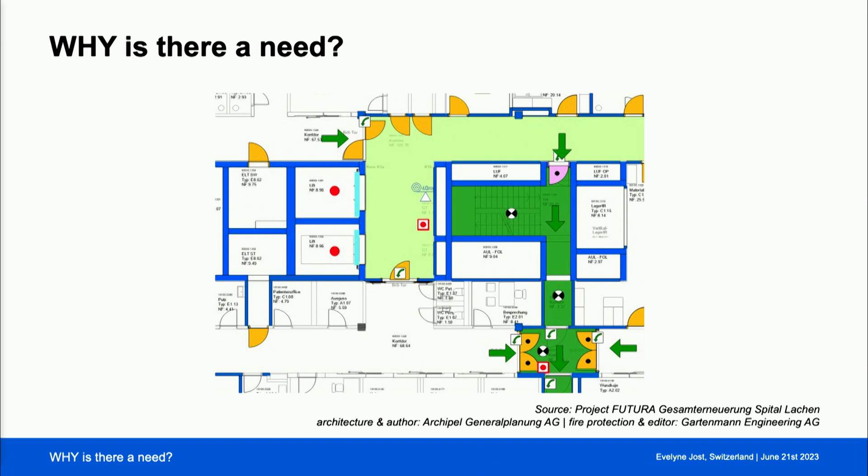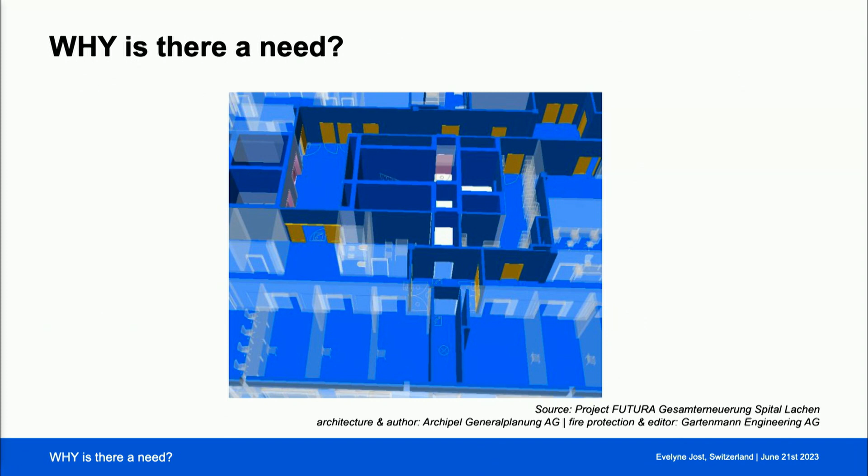Now, what do we do if we hand in a model? It's basically a 3D wall with information. It's more or less the same, it should be the same information, but the authority and the government don't know how to read that. They don't know what to do, and they don't know how to respond. We are trying to change that, of course.

So, why are we needed? There are no standards. Swiss people love standards, so this is a very good thing, but there are no standards. And we have small projects, we have small companies, and everyone is trying their best, but everyone is doing it in another way. If we could establish some standards, or at least some best practices, we would not waste that much time trying to figure out what to do. In the whole building community in Switzerland, we could save so much time, and nerves, of course.

And often the fire protection is left out. We are not there as in Norway. We don't have BIM in every project. But if we do, specialists like fire protection experts are often left out because they usually don't have their own model. So what do they do? They just speak to them, try, whatever. I experienced in various projects that they are left out in the process of BIM. So we need to change that.

And I would say there's not one way we can work together with specialists like fire protection experts. We can do this low-tech. You can sit in front of a computer, give him the information back and forth, and type it into the BIM. Why not? You could do this by Excel, as Michael showed. That's one way to do it, maybe mid-tech or low-tech. Doesn't matter, because you deal with information.

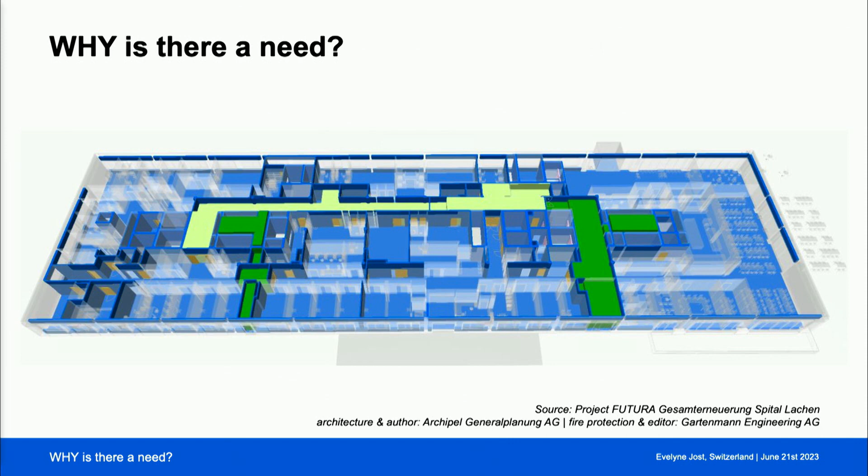So in the project I showed you before, they used the mid-tech version. They took the architect's model. We implemented fire protection information on the rooms and on the walls, but they cannot go back with that. But they can check it against each other again.

So what have we achieved as an association yet? We established an exchange information requirement for the building permit. So we know what the client, at this point actually the government, the authority, needs, and we broke it down. That's just one tiny bit of this exchange requirement. We broke it down to each element, on the IFC standard, what information and where to put it. So we can use this in several projects, with several authorities, in several regions. This is one big result.

But the other one is we developed a new approach. Because we were typing the information just on the elements. But usually, when we design a building, there's the client, there's the user in the first place. So you order a school or an office building. This means you have different requirements and rooms that you will use. And the rooms are always giving the requirements for the fire protection. So why don't we start with the rooms? The rooms are giving us the requirements. How many people are in this room?

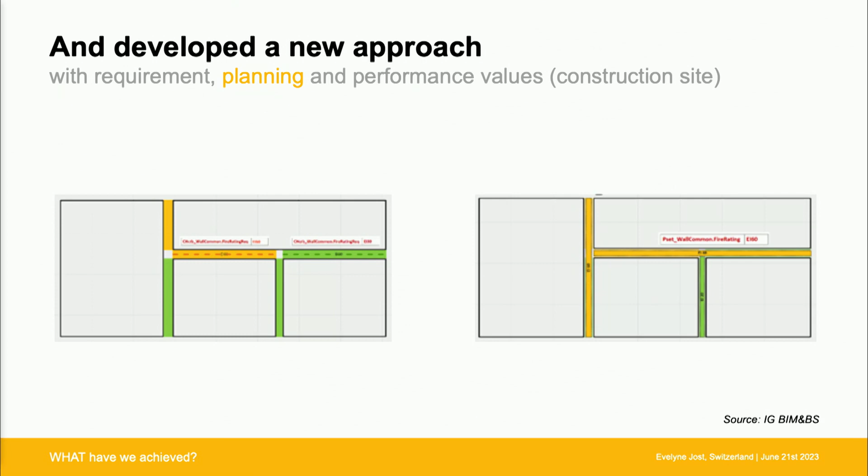And in the end, on the construction site, there will be a performance value which has to meet, obviously, the planned value we have on the wall coming from the requirement. So these are like the 3 steps, and we are putting those 3 steps all into the BIM. And this way of work, this approach, does not only work for fire protectionists, obviously. We can use this for soundproofing, we can use this for construction physics. So the goal is to not only do this for fire protection as we do today, we could roll this out for other specialist disciplines.

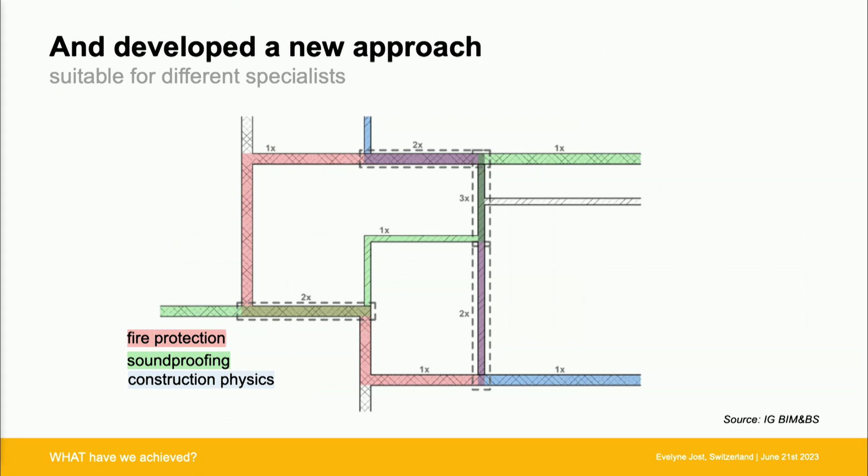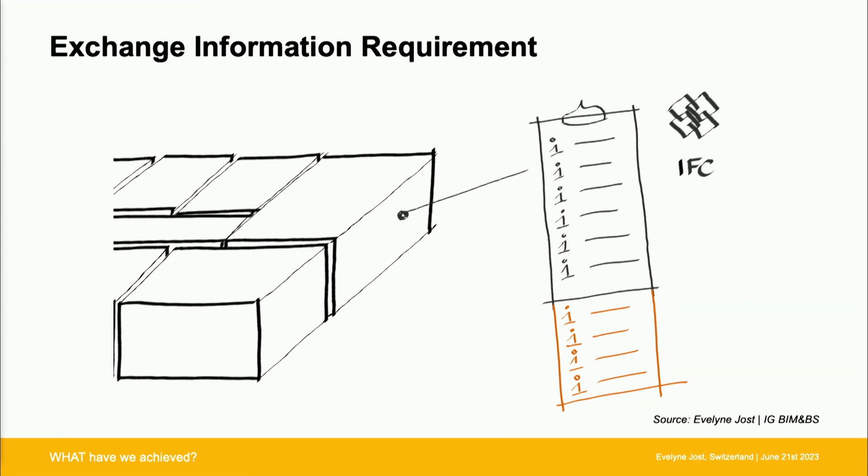So coming back to this exchange information requirements, we put the requirement itself on the room, and we used the international standards of IFC as far as we could. Only where we couldn't find a container for our information, we added this to the IFC standards, but we are always going with the standard in case we can. Showing that in a small matrix, we found out that on the building components like walls, doors and stuff, we could mostly put the information in a container that's already provided by IFC, but the spatial elements where we put the requirements is not there yet.

Maybe because we have a different approach than all the other countries. I will be happy to be discussing this with all of you guys in the next break. But we found out we have to add there more of the information stuff. But maybe we can change that as well in the IFC standard. But that's just what we found today.

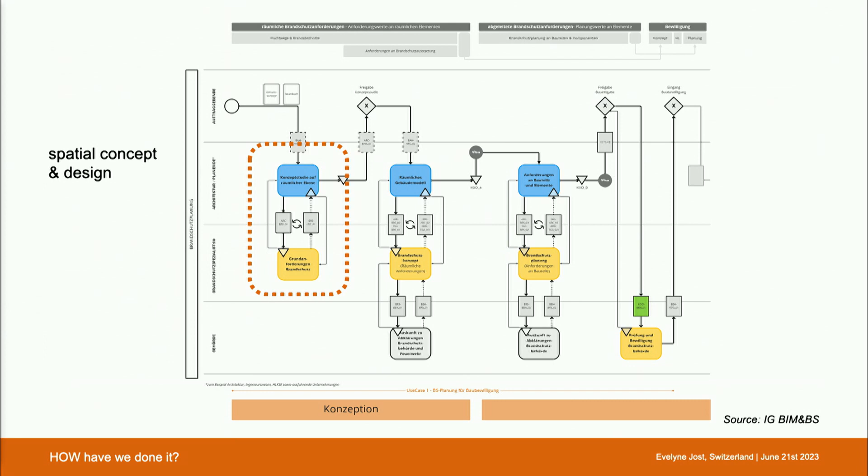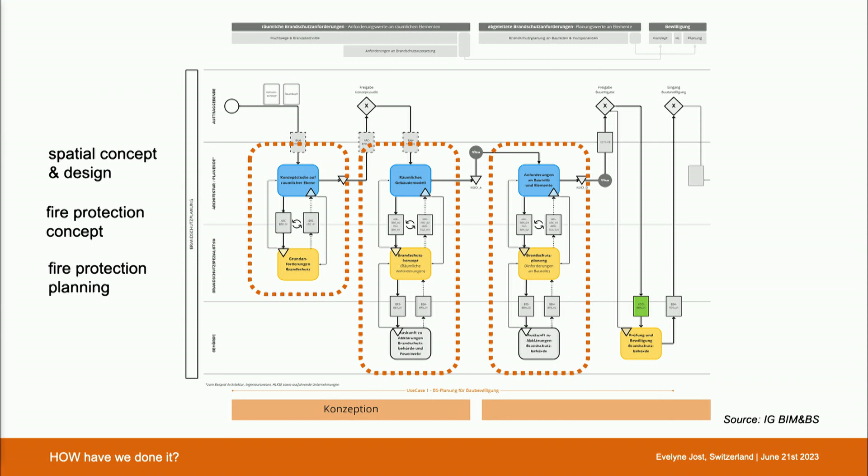So just very shortly, how we achieved that, how we did that, and what did we do? We actually followed the information delivery manual. So we firstly established the process. It's the same as we do in VDC certification, right? We write down the process which is today and then the new process we want to have. With spatial concepts, with fire protection concepts. So first the requirements on the room, then you plan the values on the walls, and then you go and hand it in to the authority.

Then we broke it down to single transactions. So what do we have to hand over to whom, and what information does he need in the BIM, and what information does he give back, and what's the container of that information in the BIM.

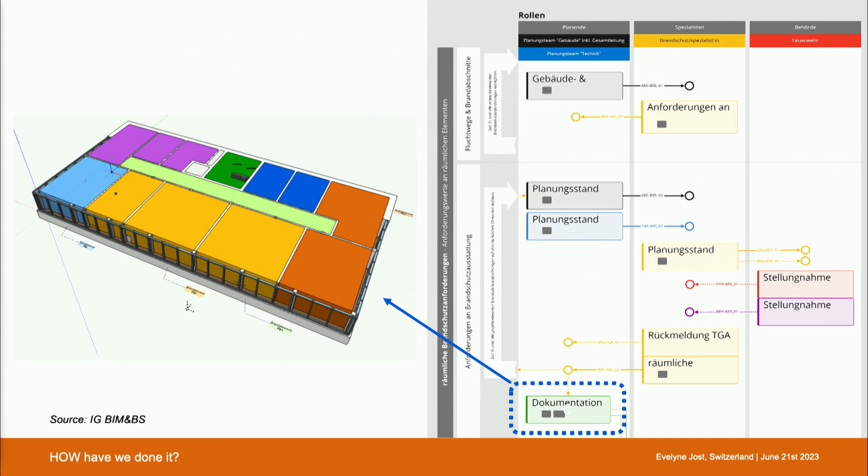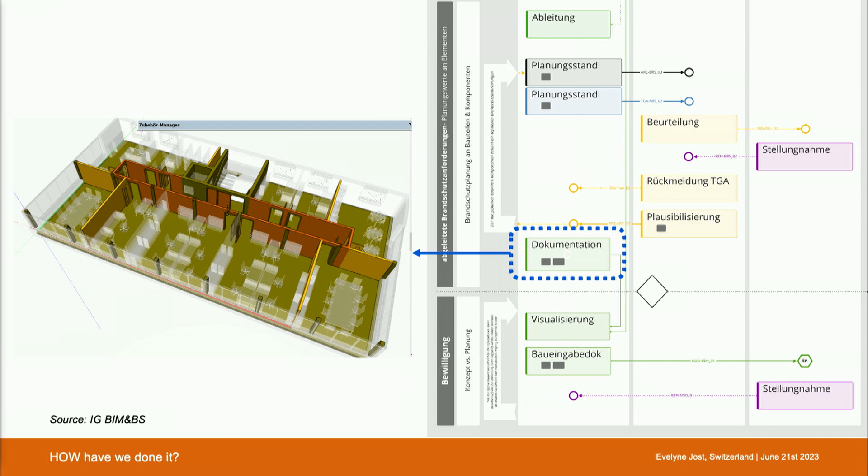Just to show you a picture of the project we did. So this is an example for the spaces, the rooms we put on the requirements. So every color is one fire protection compartment. So the yellow ones belong together, then there's another requirement to the blue or to the orange one. In the next step, there's the value on the BIM, on the walls and on the doors, matching these requirements. And if you line those together, then you'll see the horizontal rescuing way or the vertical, and what this means for the values on the wall.

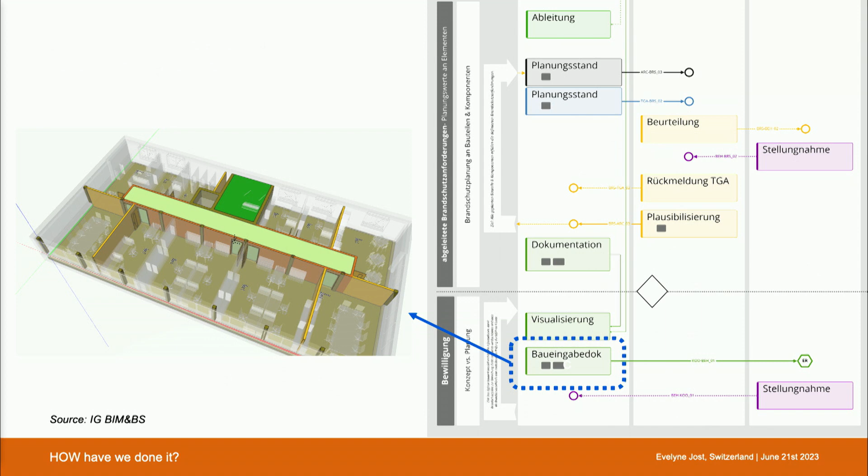So to sum this up with challenge and outlook, Swiss people love perfectionism and we love standards. So as long as we cannot roll this out in a lot of projects, there will be a lot of skeptics. So we have been working on this for 5 years. We finally managed to find people who will try it with us. So we are doing this in projects now, and when we can show that, we will get there. But until then, the perfectionism says, ooh, I'm not sure if this is gonna work, right?

So, and the authorities, they are not there yet as well, but we are working on that. We have a project with the capital city of Bern. They will now take this model, the BIM model, and will check it, and will set up this process, how to get there, to be a good example for all the other authorities, and then we can show them it's actually possible, right? And not to mention all the barriers. We have a lot of different authorities. We have a lot of different languages, actually. We have 4 languages in Switzerland. So they're very small regions, and we have to convince them all to get there.

So the outlook, as I mentioned, we recently partnered up with 2 big construction companies who will do this in a project, and with one government who is going to check this particular project for the information, and then we'll see how we get there and if we can convince the other people. So we will be testing the approach and the way we are doing it, and we will challenge it, of course, and we will validate if the exchange requirements are enough. Did we forget something, or maybe is there too much? So we need to challenge this with, obviously, the construction industry.